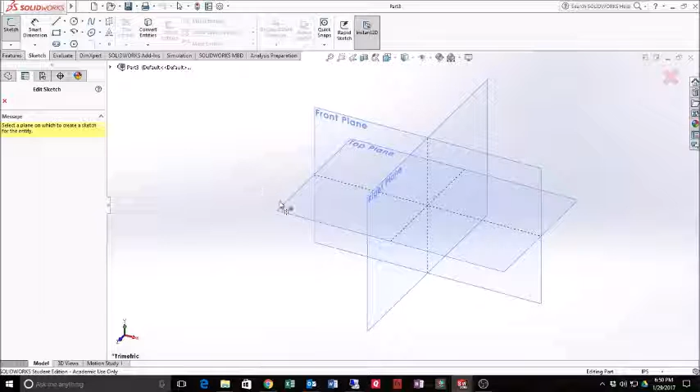I'm going to turn my planes on temporarily and place a sketch on the top plane. Now I'm going to go ahead and turn my planes back off and start with a primitive shape.

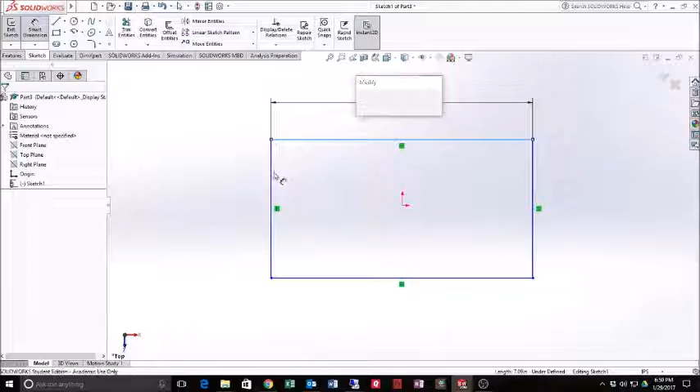Of just a rectangle, and I'm going to smart dimension that to be my overall size of 4.5, and my overall width of 3.

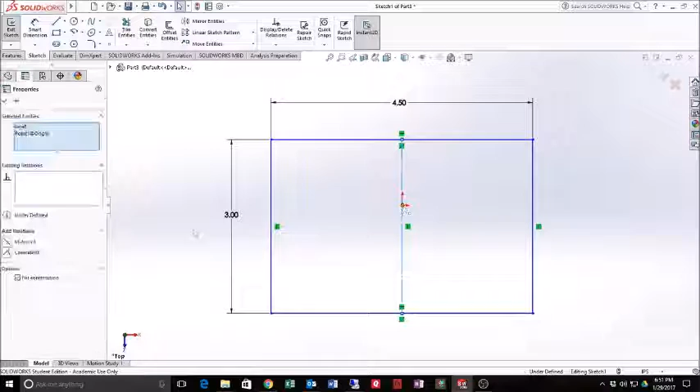Now, I want to go ahead and fully constrain this. So I'm going to draw a line from midpoint to midpoint, make that line for construction, and then select my line and the origin and go midpoint. At this point, that's my primitive shape that I'm going to start with.

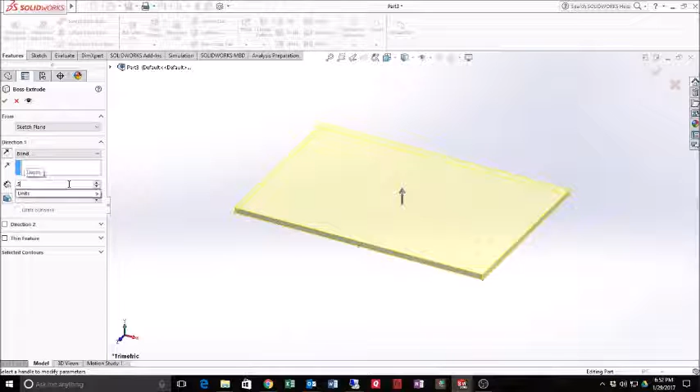So I exit the sketch, go to Features, and I'm going to extrude the distance of 0.75. And I'm going to go ahead and click the green check mark.

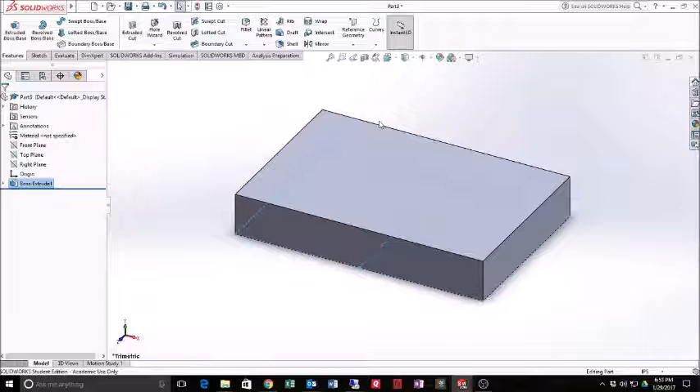Hit that to kind of center it up on the screen a little bit. Next, I'm going to do an extrude boss base, but I want to draw on that face right there. So I'm going to right click, go normal to.

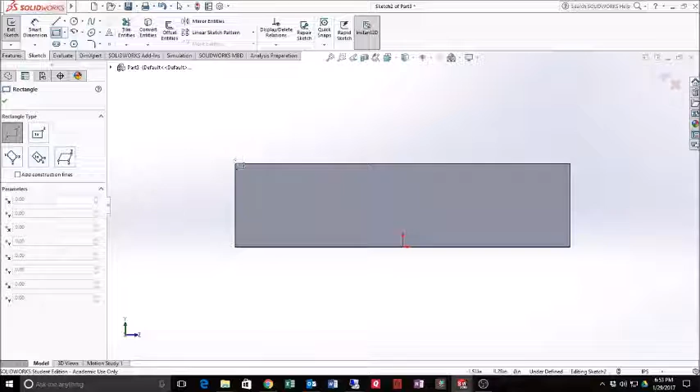Now I'm going to draw another primitive shape from that point, just kind of up there like that. And then I'm going to set that point and that point coincident.

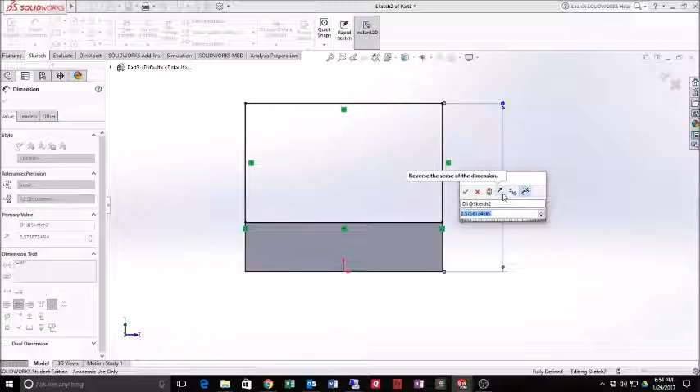Now I need my overall height, so I'm going to smart dimension to the height and come down to the very bottom and set that height at 2.5.

At this point, I'm done with this step, so exit the sketch, and this is going the wrong way, so I'll drag it over this direction, and it needs to be 0.75, and green check mark.

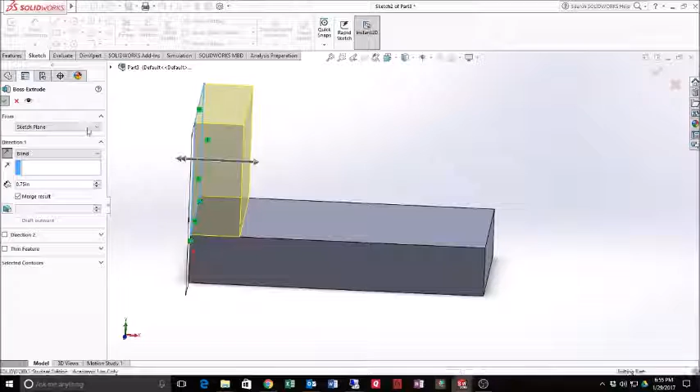Now, if I turn that isometric, it's starting to take shape, but now I want to start making my cuts. So now I'm going to cut extrude.

I'm going to draw on this face first. Go normal to. I'm going to draw a triangle like so.

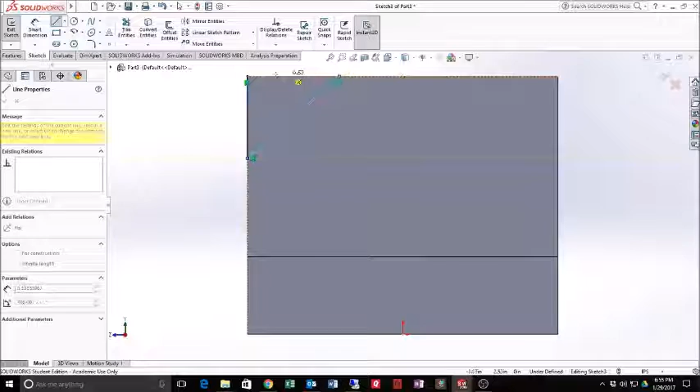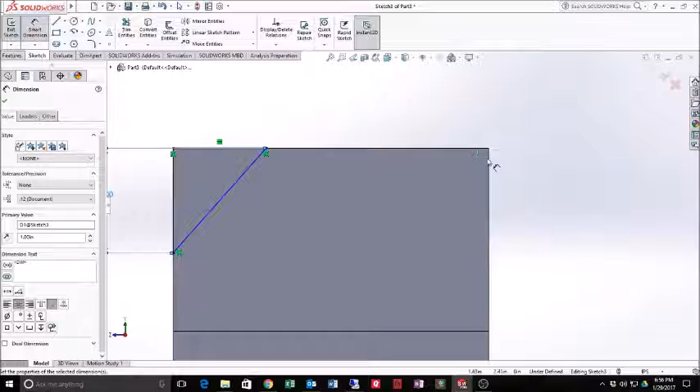And then I need to dimension that distance is 1, and the other dimension that they give us is from this edge to that point, and that is 2 inches.

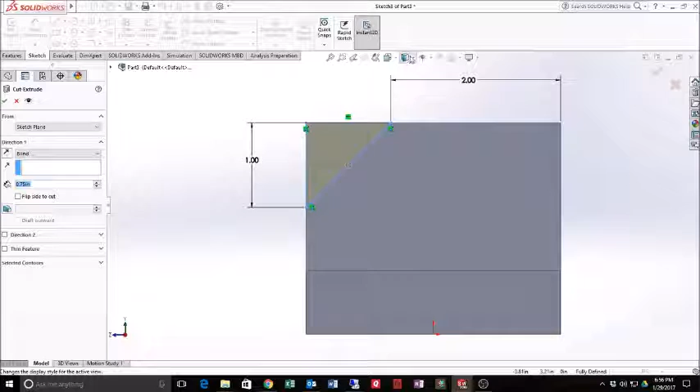So now go ahead and exit the sketch. I'm going to go ahead and turn that, whoops, there we go. And I want to go ahead and go through all and make the cut.

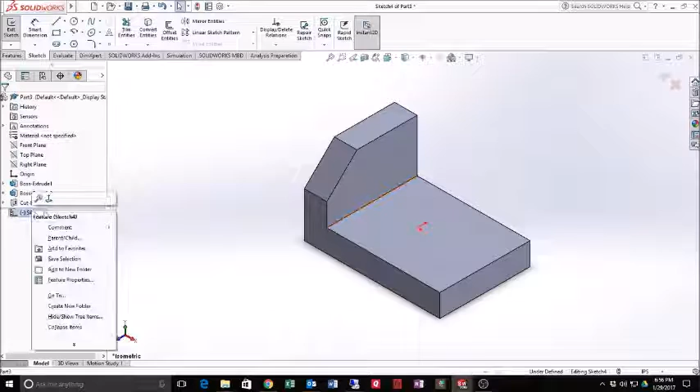Next, I'm going to draw on this surface, normal to, choose my rectangle, and just draw a rectangle there.

I'm going to draw a construction line like so, because what I want to do is go from the origin and that construction line, make it coincident so that my cut is centered on the part.

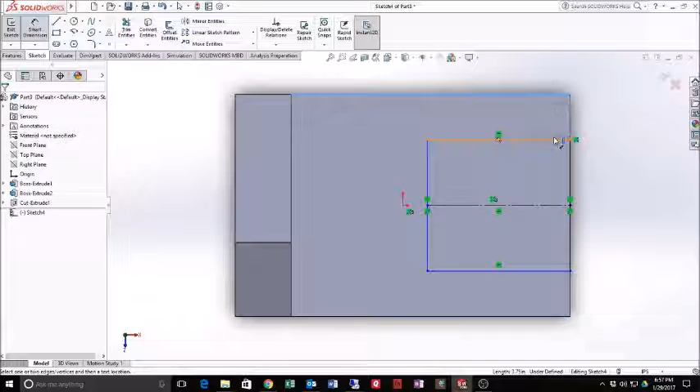So now I set my smart dimension from here to the first edge. They actually give us in the book this side, but because it's symmetrical, I can do it to either side. And that is 0.5 inches.

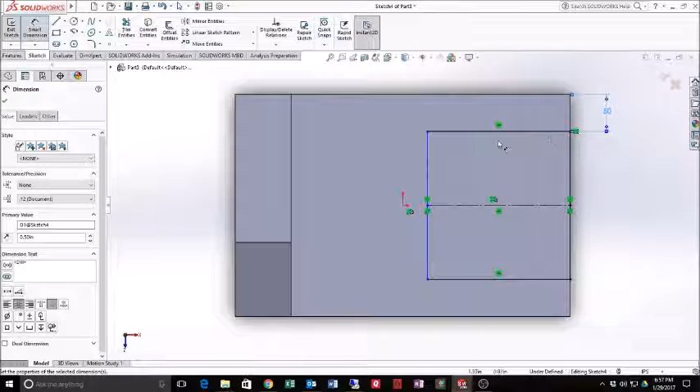And then I need this distance, which they give us is 1.5. The other way that I could have dimensioned this size would be I could have given the opening, and because I have it centered on the part, it would have done the same thing.

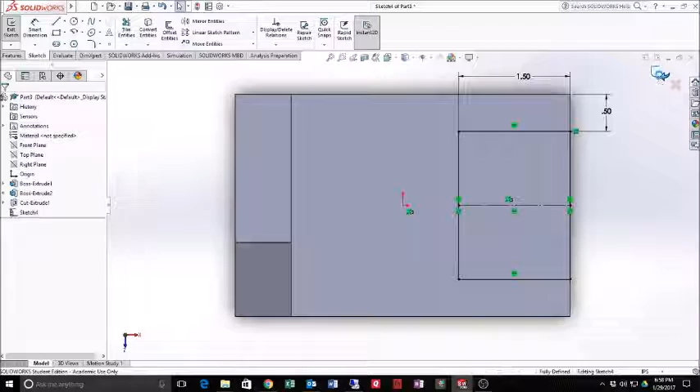So, done with that step, and now I want to make the cut through all, green check mark.

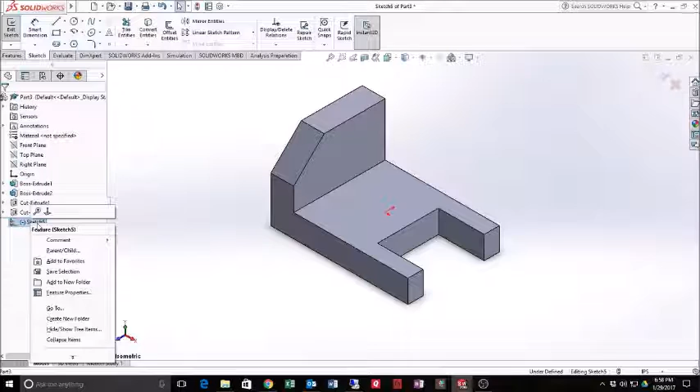Last thing I need to do, make my extruded cut on this surface. Go normal to, and draw a circle.

And this one we can do just a little bit different. I can pick the center point, I can pick the origin, and I can set those horizontal. That will center my circle on my part.

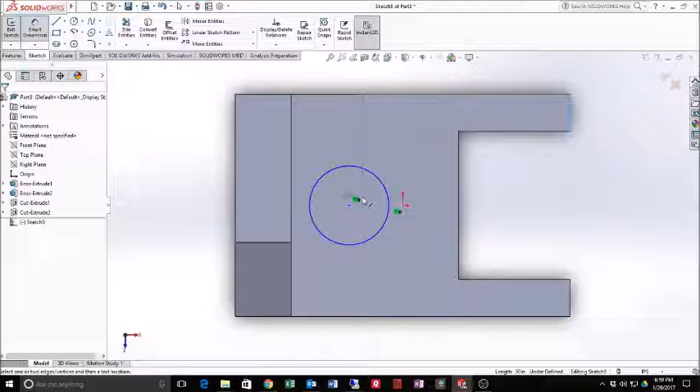So now I need a dimension from here to the center, which they give us as, looks like 2.67.

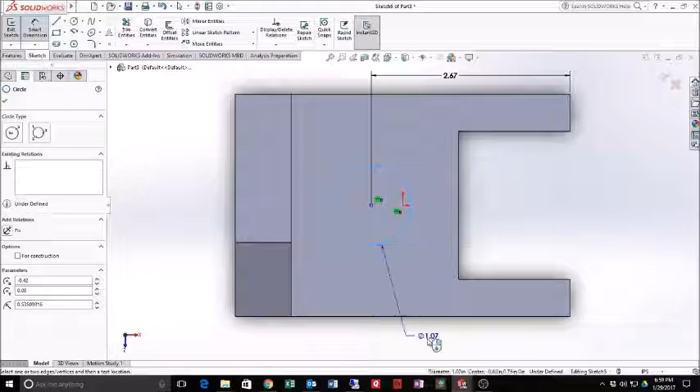And then we need our diameter, which is 0.75.

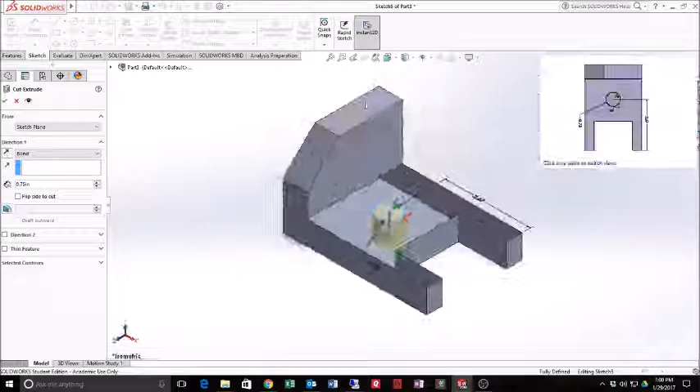That concludes this portion, so I can now exit, turn that, and go through all, green check mark, and now I have my part.

We have a lot of steps for this part, but we used primitive geometry to create the part.